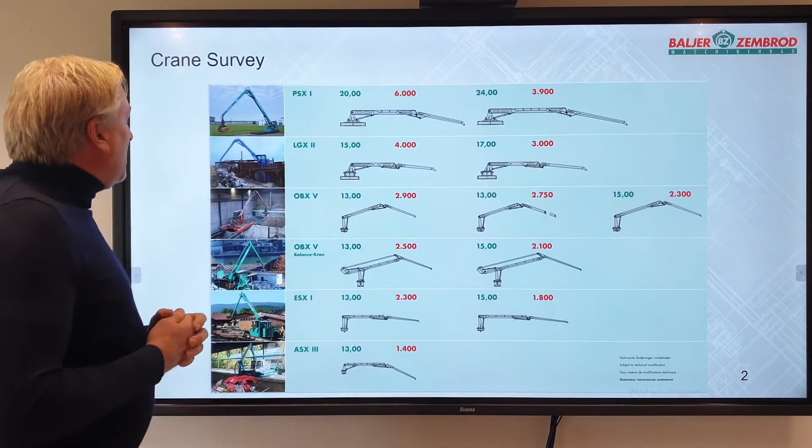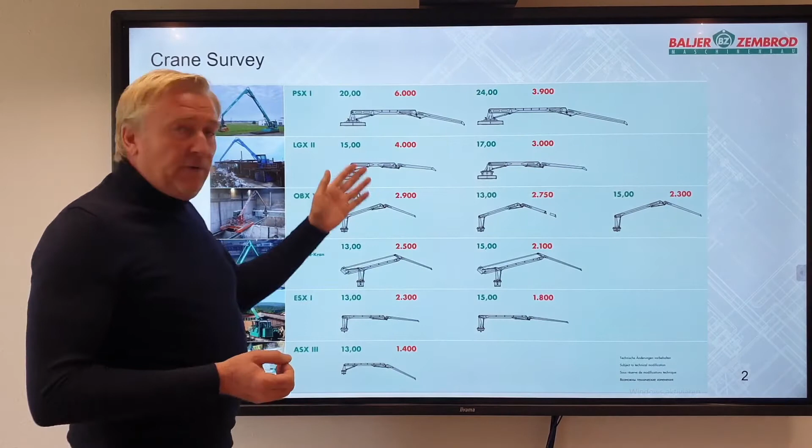On the next slide, I show you the survey of our cranes. You can see we have 6 models. Actually we have a 7th model, called R6 - it's not in this brochure or my presentation, but it's really new. Our biggest crane is the PSX I and our smallest crane is the ASX III. The green figures give you the length of the arm system, and the red figures show you the possible weight you can lift with these cranes.

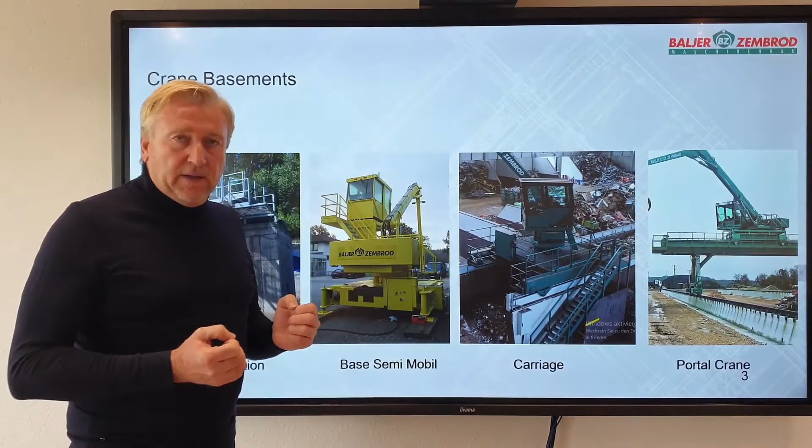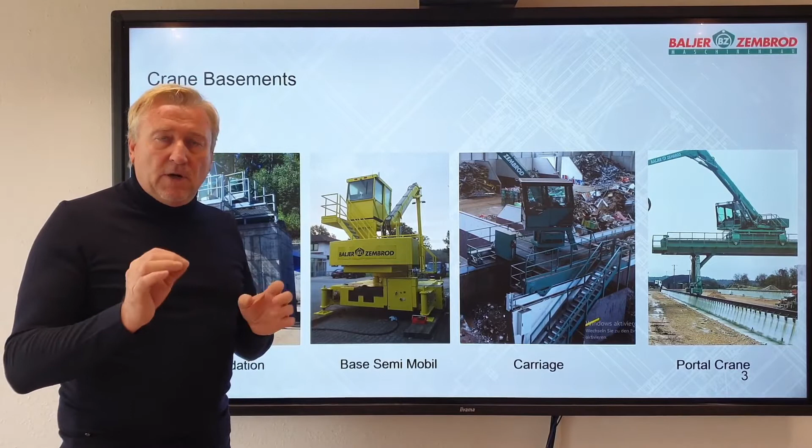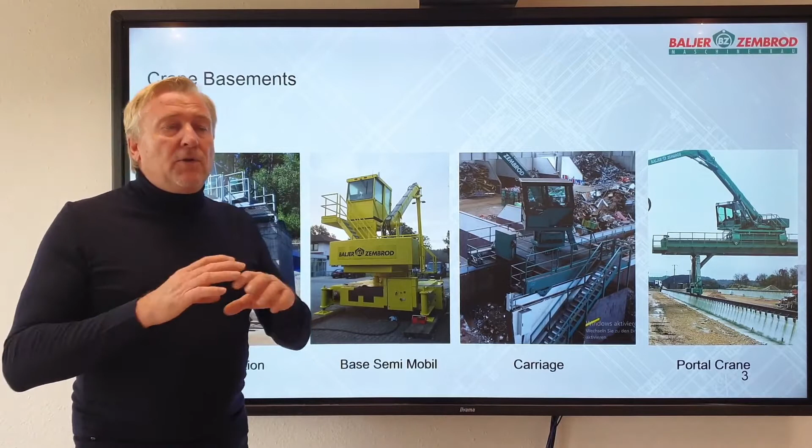On the next slide I will start to show you the components of our cranes. If you talk to us, you might say, I need to lift 2 tons, I need a length of the arm system around 12-13 meters, and we are working on a day base, in a 1, 2 or 3 shift environment. With this information, and a bit more, we go back into our planning, and then we have a lot of possibilities. We can take different arm systems, different cylinders, different crane bases, and different power aggregates.

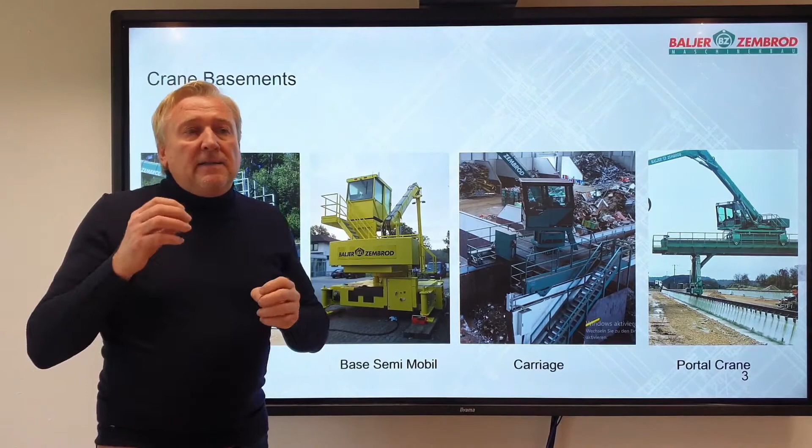Our aggregates start with 37 kilowatts and go up to around 110 kilowatts. So this is the kind of set of possible features with which we can deal and find the right crane for you.

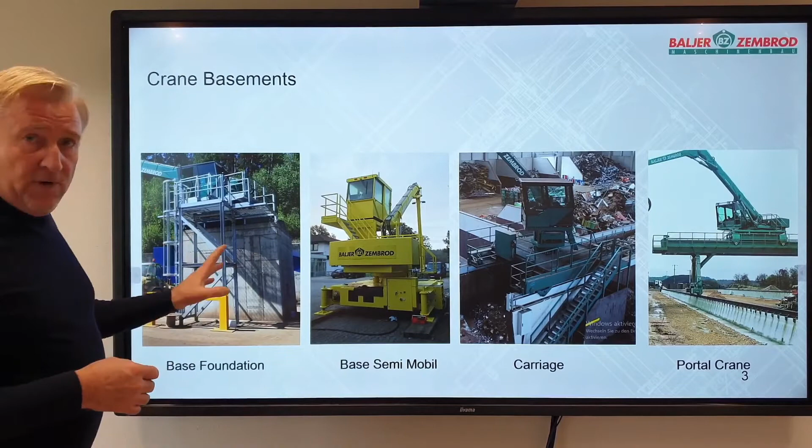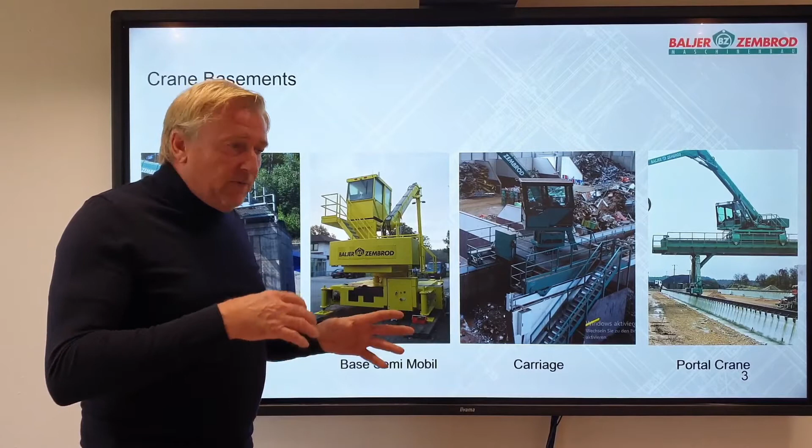And I will start with some of the basements - the basement is where we put the crane on. We can put it on a base foundation. We can put it on a semi-mobile part, so that you can move the crane from time to time, not on an everyday or day base. You can put it from time to time - maybe if you change your process, you can put the crane in another position.

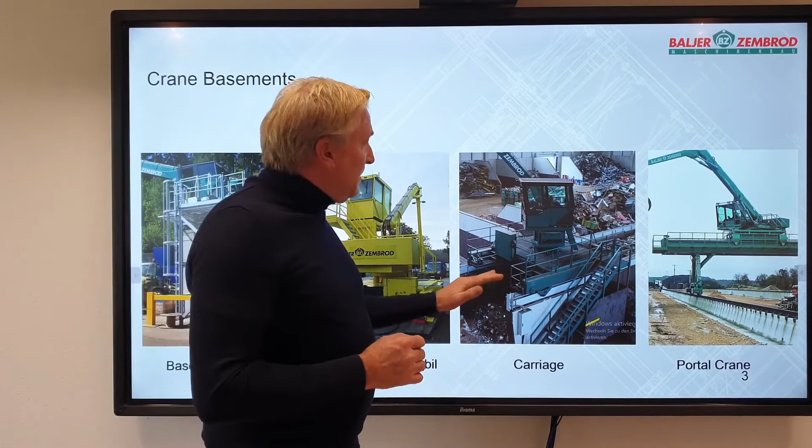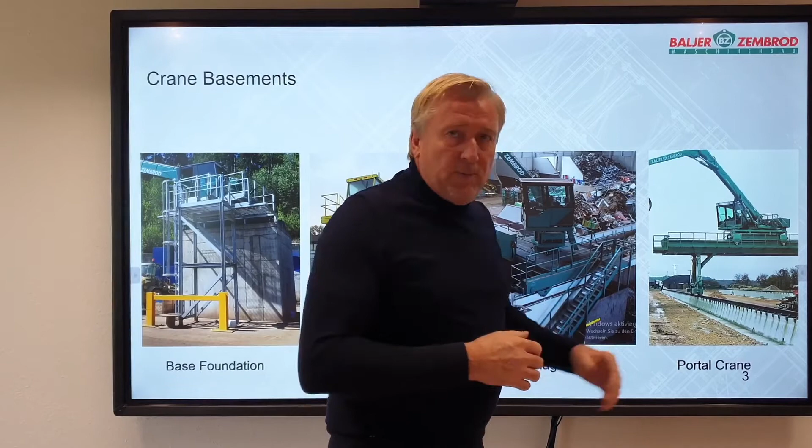And then we can deliver a carriage system with wheels. You can render it at 20, 30, 80, 120 meters - it's not a problem for us. And we can give you, as a foundation, the portal crane. These kinds of cranes we normally use in the wood environment. So this was the base of the crane.

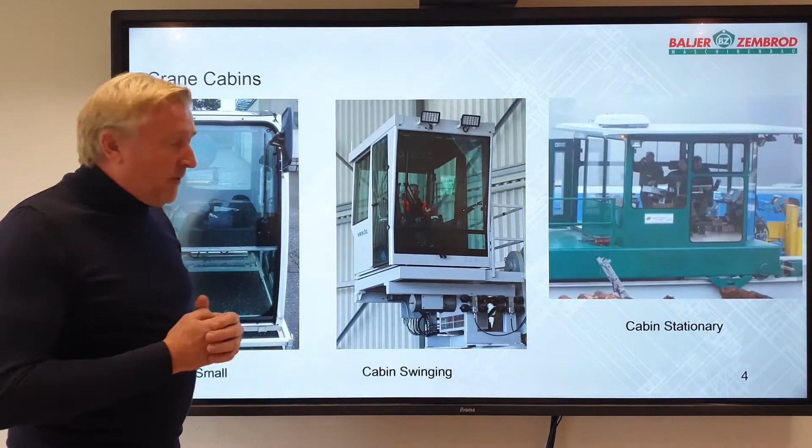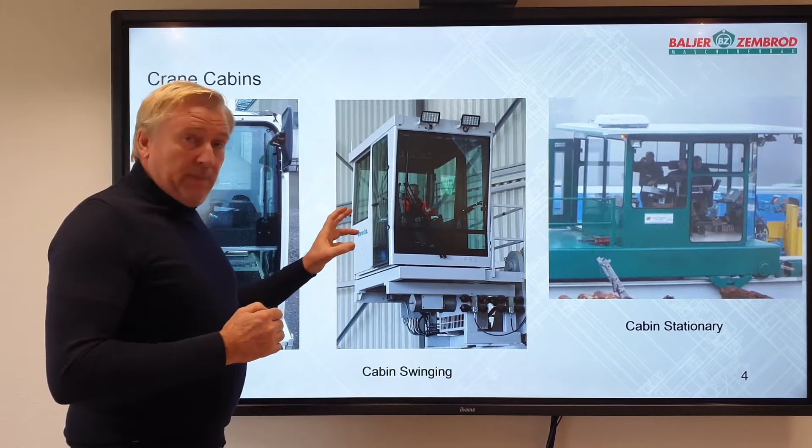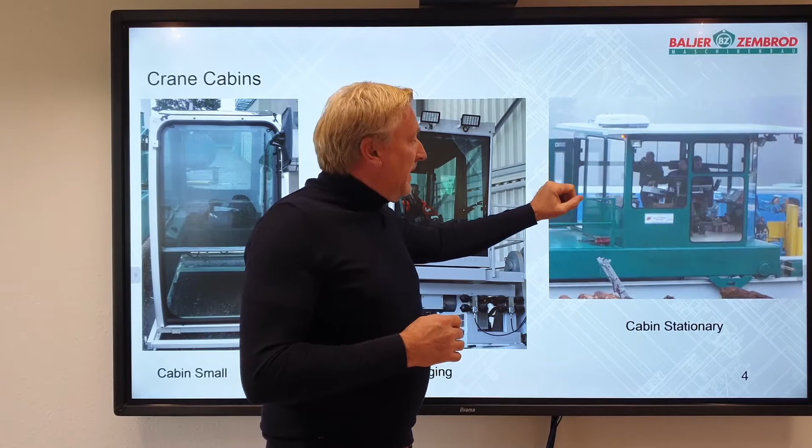The next big component is the cabins. So you can have a small cabin like you can have from Sennebogen or from Liebherr. You can have our swinging cabin, which is able to turn around the base - it's a well-stuffed cabin, very comfortable, a big cabin, and it's really good for your employees to work in. And then we have the stationary cabin - this is really like an office, and you normally use it in the wood industry.

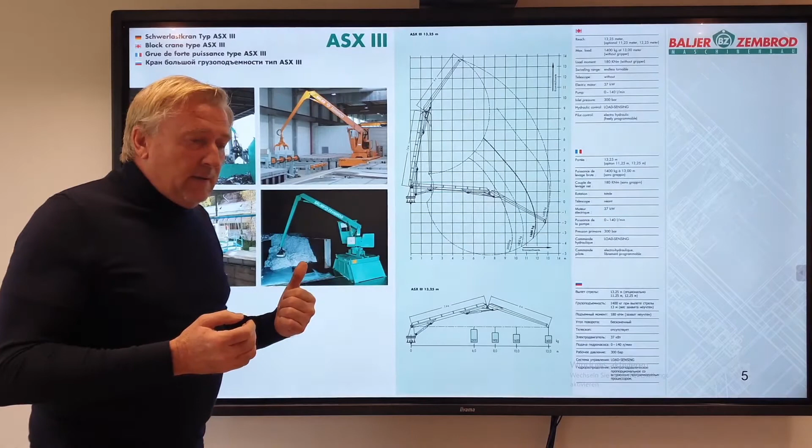So the next picture, I will start with the introduction of the crane systems - a short introduction. So with the ASX III, we use this crane normally for light activities.

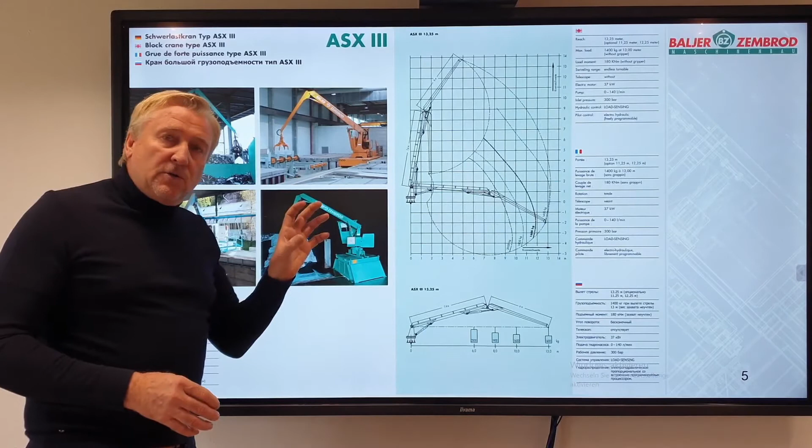With 13 meters you can lift 1.4 tons. You normally handle aluminium or light material, or use it for loading trucks from a small base or a small pit onto a truck. It's also good if you have to do this work in small halls, around 6 to 7 meters high.

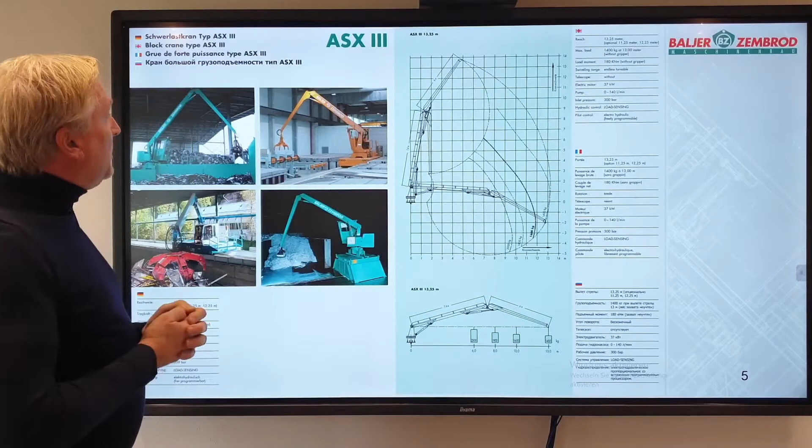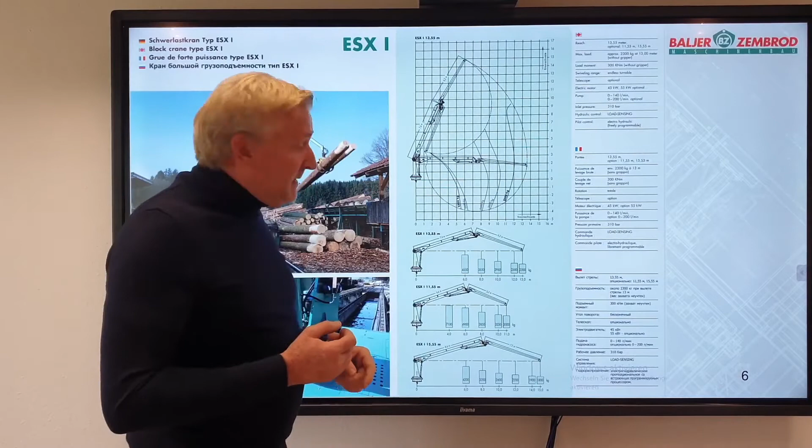The next crane I will show you is the ESX 1. It's a well-manufactured product, good in the market, deep in the wood industry, a little less in the recycling industry. It's for one shift. You can lift by 13 meters, around 2.3 tons. And as always, our cranes are able to be delivered in different length systems.

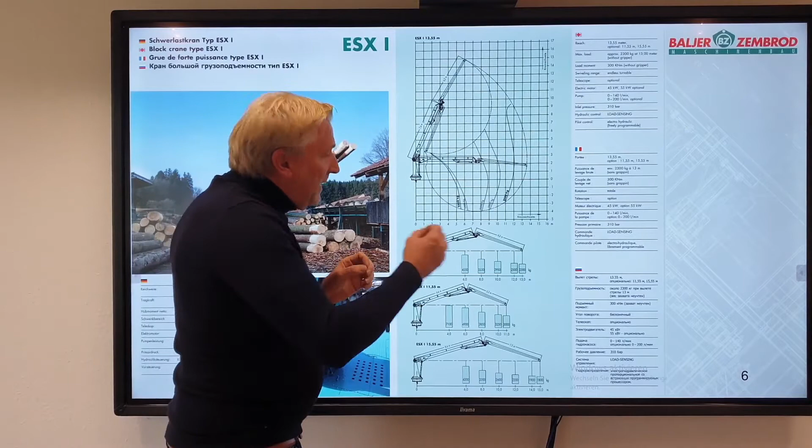More length is less lifting power. Roughly, if you go smaller, then you will have the possibility to lift more.

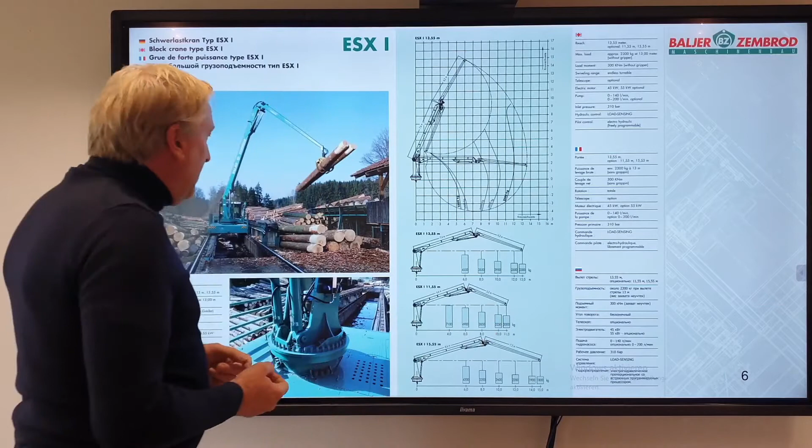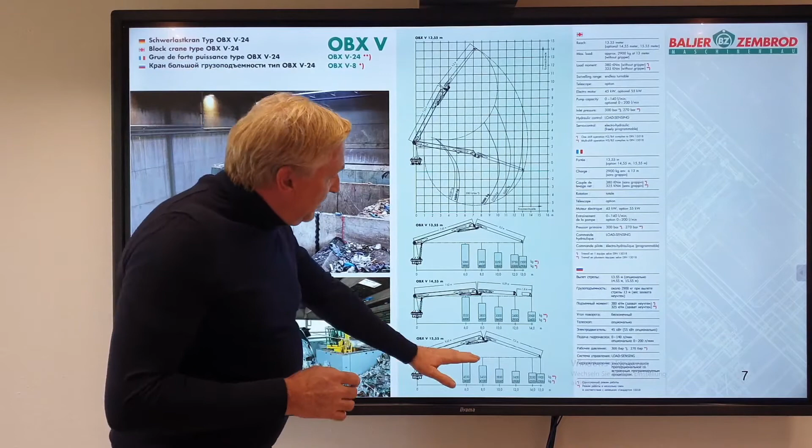So the next crane is the OBX V. On the picture you can see you can have it on rails or on a base foundation. It's like an ESX 1, a little bigger, and you can lift with 13 meters 2.9 tons. If you are on multiple shifts, then a little less, you have 2.5 tons to lift. You can also have this in different arm systems.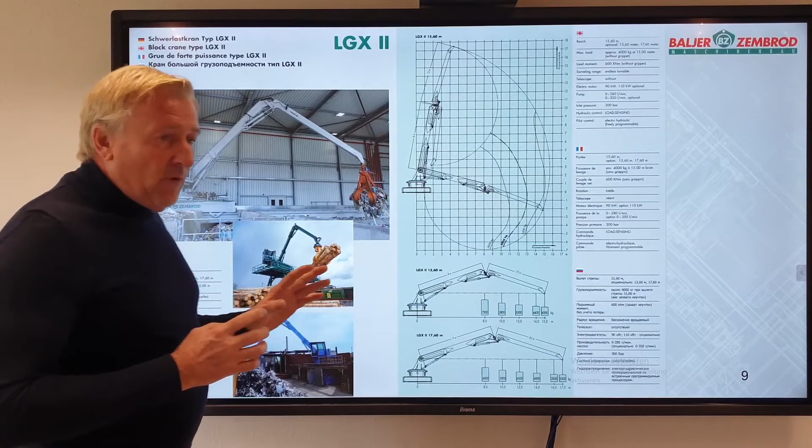The next machine is our LGX. It's a bigger one, and we use this when necessary to lift more power over a bigger distance. With this crane at 13 meters you can lift up to 4 tons. And if you go to 17 meters, you can lift 3.3 tons.

Here in the example you can see on a rear, this arm system is 17.6 meters, and this grip has 2 cubic meters of content and material to lift. Here you can see we use it also on a base foundation and on a portal crane. These are bigger cranes, we have it also in the marketplace. Beside the OBX, this crane is also one of our recycling cranes in the market.

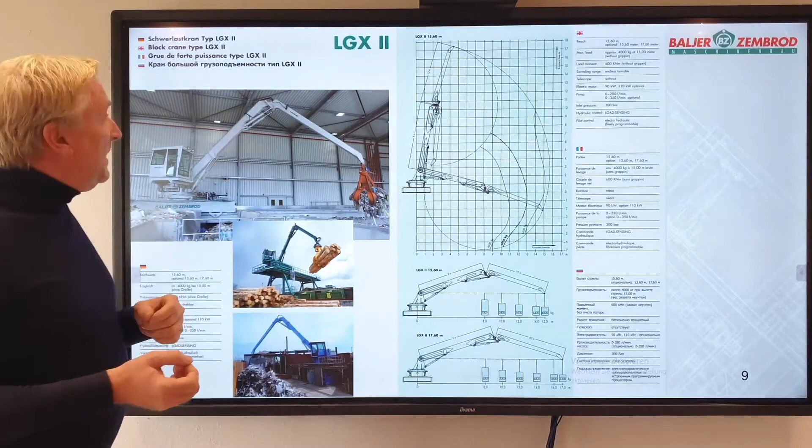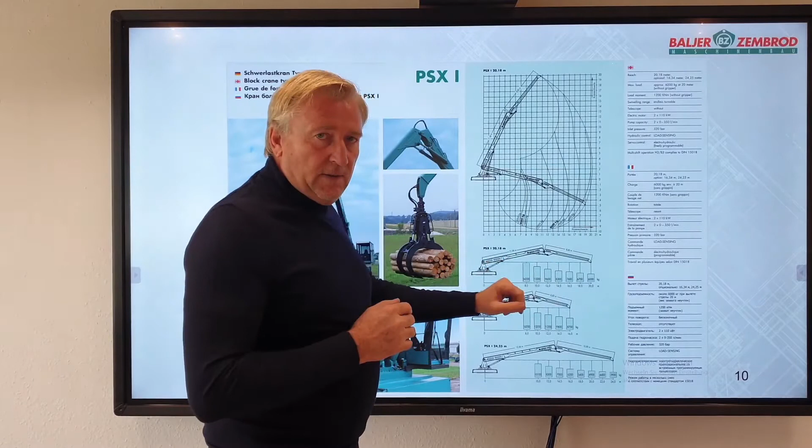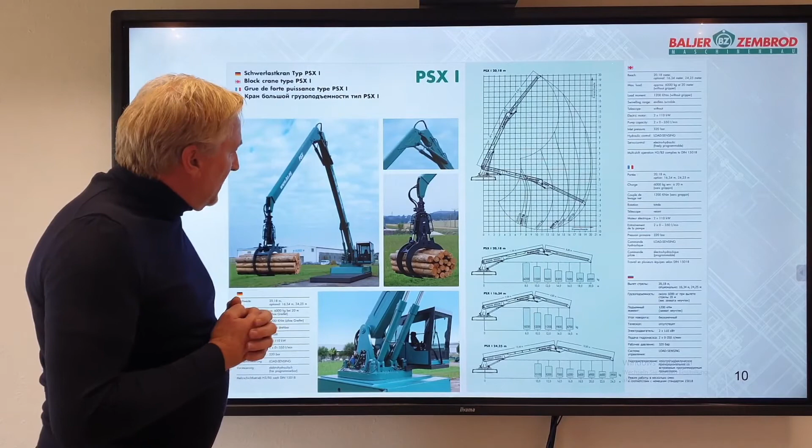Maybe this crane is also good if you want to deal with community waste, with sand or such kind. Also available with all length systems. The specialty is we need 2 110 power aggregates. So that's really our biggest crane at the moment.

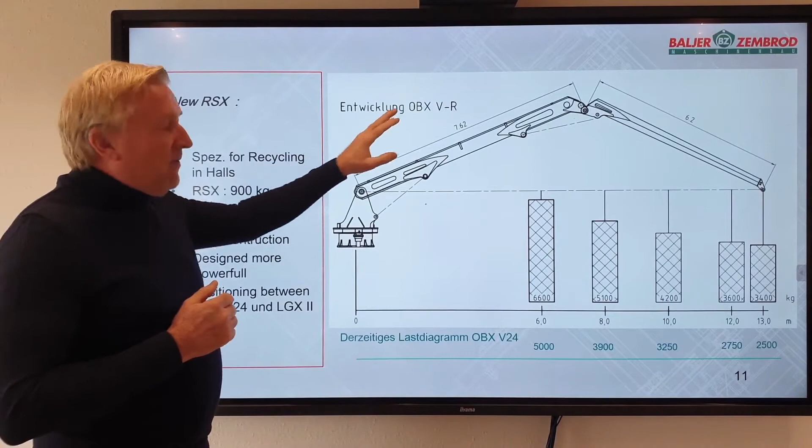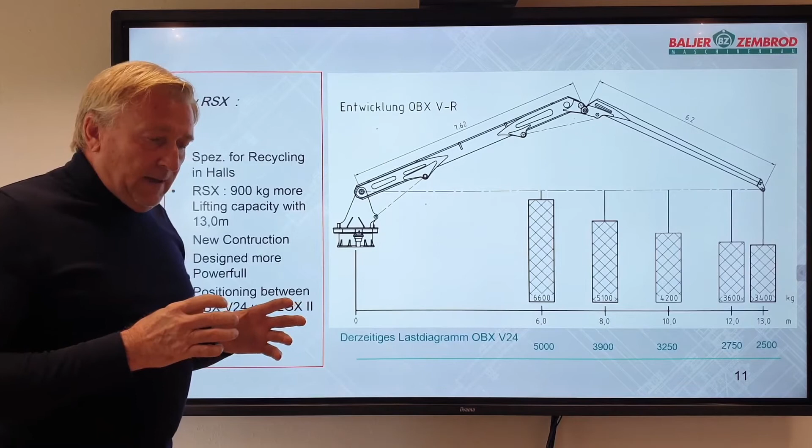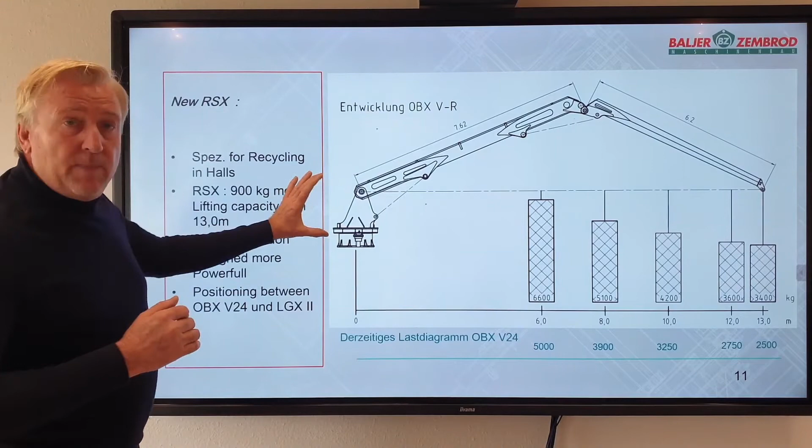On the next slide, I show you our new crane which we have developed. You can see the first name was OBX V-R. This has changed, now it's called the recycling crane, and this crane was developed for the necessity that we have to lift more weight and put that crane into existing halls. So we decided that the crane base is not so high and that you can lift 1 ton more than a normal OBX.

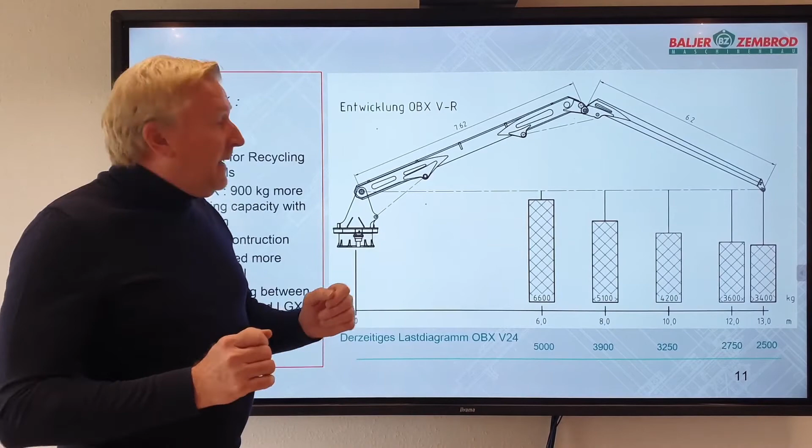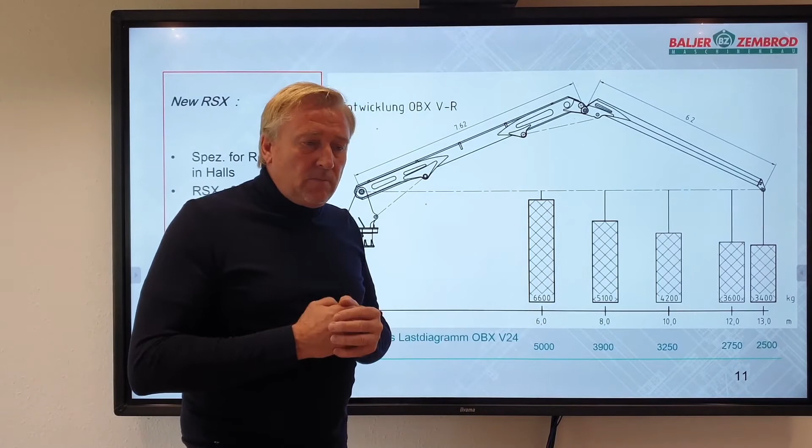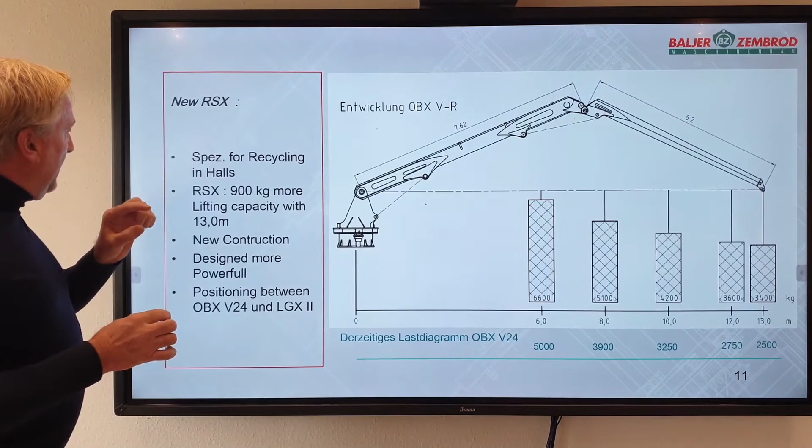This is the reason, although in the recycling industry, where you have from time to time to lift up big packages of around 1 ton, and on the other side where you have a specific weight of 200 kilograms per cubic meter. So that's a big difference, but from time to time we have to lift a lot. And the problem always is that our grips are very heavy. So a normal grip, which is 650 liters, we have 1.5 tons to lift. So now we position it between the OBX and the LGX. And at the moment we have a lot of proposals running with this new RSX crane.

Now I will show you a typical customer request example. A customer comes to us with a 3D graphic. You can see here a possible crane, and you can see what he has to do. He has to lift up material from here, from the pit and the hopper. And he comes also with a few features necessary for us to start the planning.

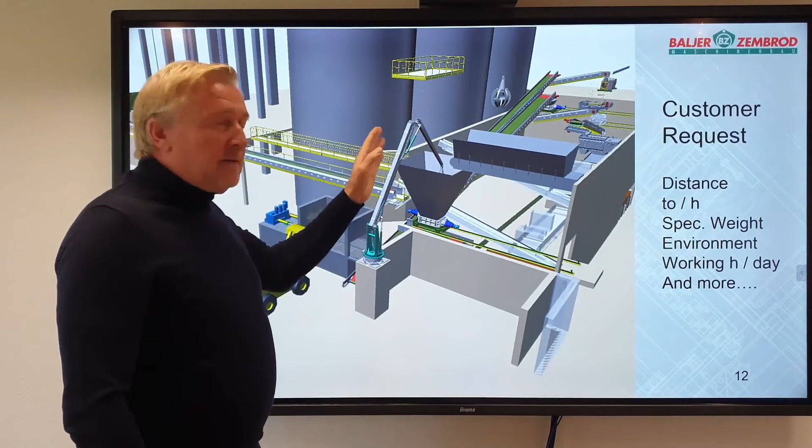So what we need is the distance, the tons per hour - how much you have to deal in one hour, a specific weight, and the environment. Is it in a hall or outside? How high is the roof? We also need working hours per day, so shift or multiple shift, and some more features.

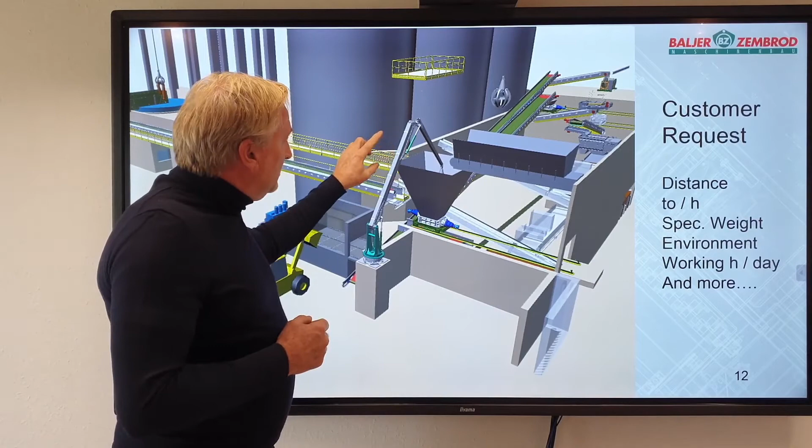Now the customer here comes to us and says the weight is very specific - it's around about 2 tons, specific material. And we have to lift these 2 tons to a height of 8 meters and put it in a hopper. And we have to do this in a 2-shift way.

So what we are doing now, we sit down and start planning, and the result of the planning, I will show you on the next page, looks like this one. This is a typical planning which you will get from us in the phase of a proposal.

You don't have to pay for that, but it's necessary for us to deliver you this information, because if we are selling you a crane on a base, you won't be able to change this. So distance, reachability, and all that stuff has to be fixed before, and we have to measure around and come back with a proposal.

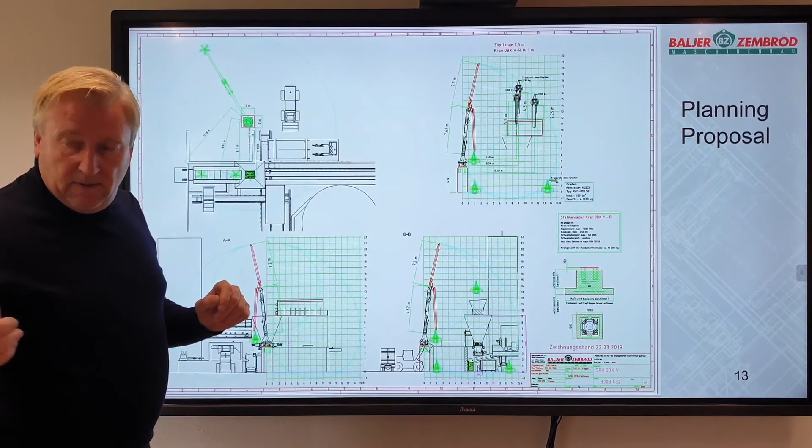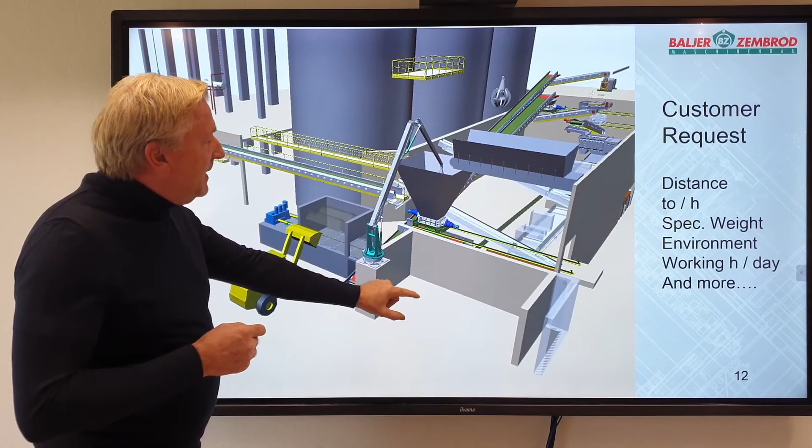And if we go back to the slide before, you see the crane on the base, you see the hopper, and you see the pit. And then if you go to the presentation, to the plan, you can see here is the crane with the base, here is the hopper - you can see the area from the side, and you can see the positioning of the material.

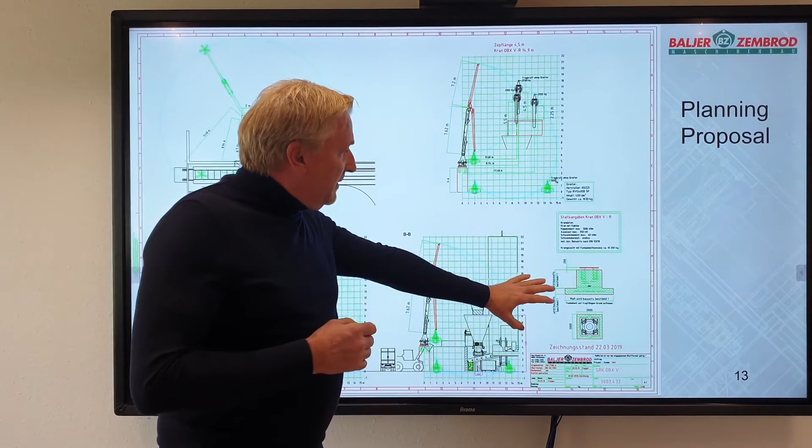And what we are doing is we now design a crane so that all the handling you want to have from us is necessary and could be fulfilled by us. We also deliver you static information to build your base, and we deliver you information around the crane, so that you can start your own planning with your static guys and your architects on your side.

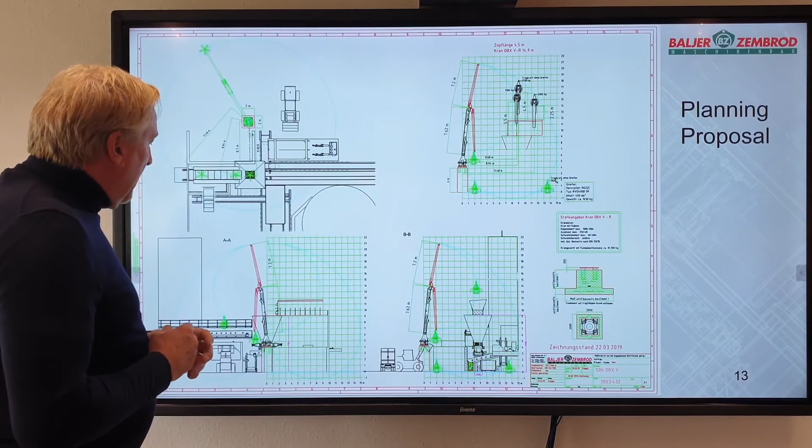Based on such planning and the negotiations we have with you, we are able to design your proposal. And with this information - the proposal, the planning, and the resource and capacity planning which you also will get from us - you are able to decide if you want to go with Baljer Zembrod or not.